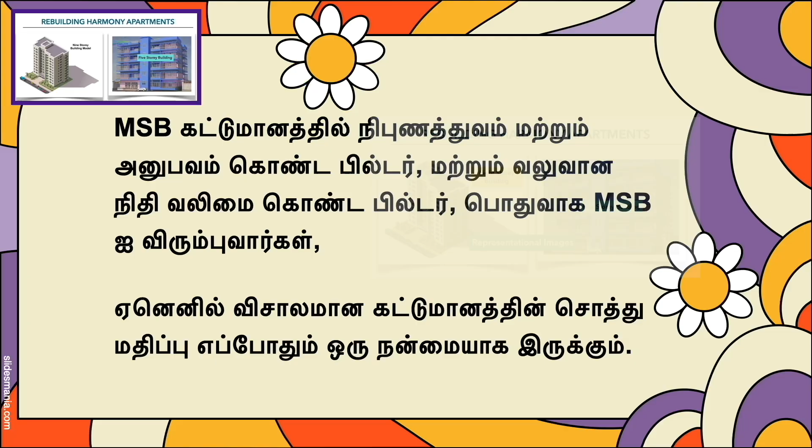The FSI calculations. One of the general points of discussion is the FSI calculations. Floor Space Index for Indian cities. Floor space index is a measure of the total permissible construction area on a given plot of land. The permissible FSI in Chennai varies based on the location and type of construction. For residential buildings, the FSI is generally lower compared to commercial buildings. The Chennai Metropolitan Development Authority has set the FSI for residential buildings at 1.5 to 2 in most areas.

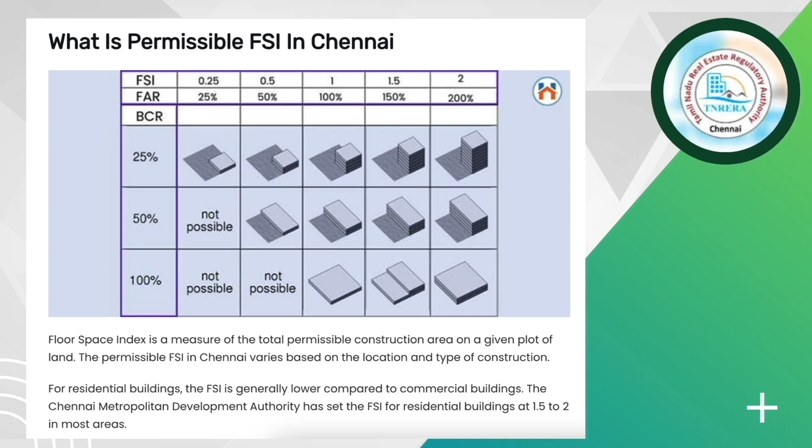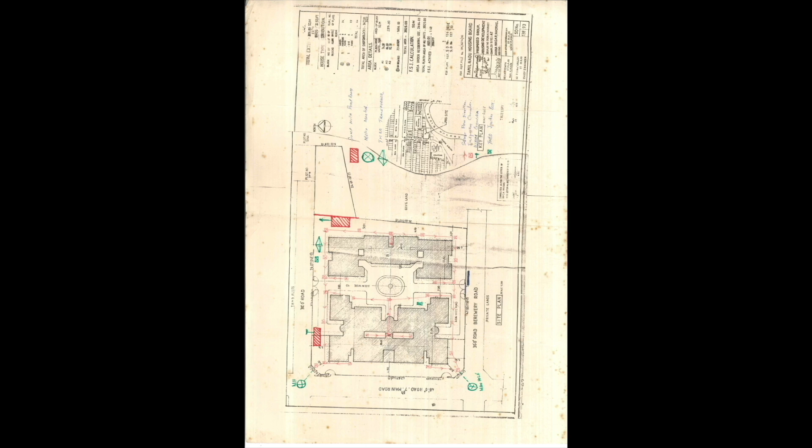FSI, or Floor Space Index, is a measure of the total permissible construction area on a given plot of land. It is a ratio of the total built-up area of all floors in a building to the total area of the plot. The total land extent available for redevelopment is quoted as about 80,000 SFT by builders. The final area will be declared by CMDA after the builder submits the relevant land documents, and it is most likely to be around the same area quoted by builders. Efficiency in space can be managed only in common area defined in the CMDA rules.

Key points to remember. According to Tamil Nadu RERA regulations, areas like staircases, utility spaces, and certain common areas are typically excluded from the FSI calculation, meaning they are not counted towards the total floor area allowed on a plot of land. Essentially, these areas are not included in the calculation when determining the permissible building area on a property. Areas excluded from FSI. This generally includes spaces like staircases, lift shafts, corridors, and sometimes even common areas like balconies, depending on specific regulations.

Importance of checking specific regulations. While the general principle of excluding certain areas from FSI applies, the exact details of what is included or excluded can vary based on the local development authority and building. Areas not covered under FSI can be planned spacious in an MSB, to make the common area more spacious for a comfortable living.

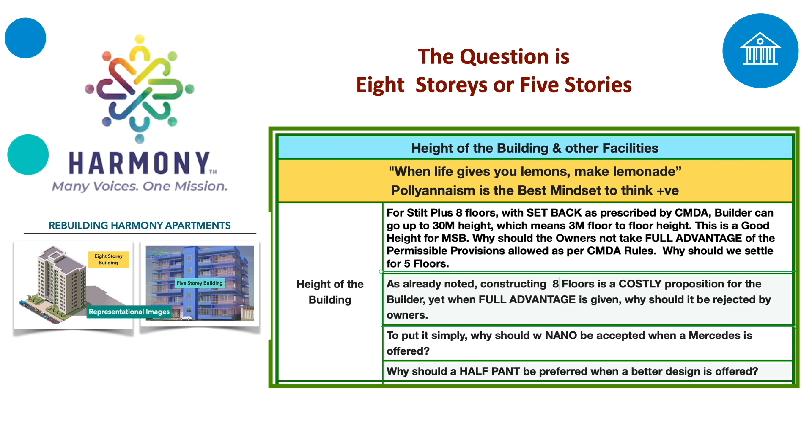To put it simply, why should a Nano be accepted when a Mercedes is offered? Why should a half pant be preferred when a better design is offered? Can the 5-story be changed to a 9-story building?

Foundation is the structural base of a building that supports the entire weight of the building and transfers loads to the ground. Foundation ensures stability, prevents settlement, and protects against environmental forces. Shallow foundations are generally used for non-MSB buildings. Shallow foundations are roughly 1 to 3 meters in depth. As expected, they don't distribute loads far into the ground. For this reason, they tend to cost less than deep foundations as they require less labor and resources to implement.

Ramaniyam has planned for deep foundation, pile foundation, for structural stability. In a building of similar size, 90,000 land extent, about 210 piles were erected.

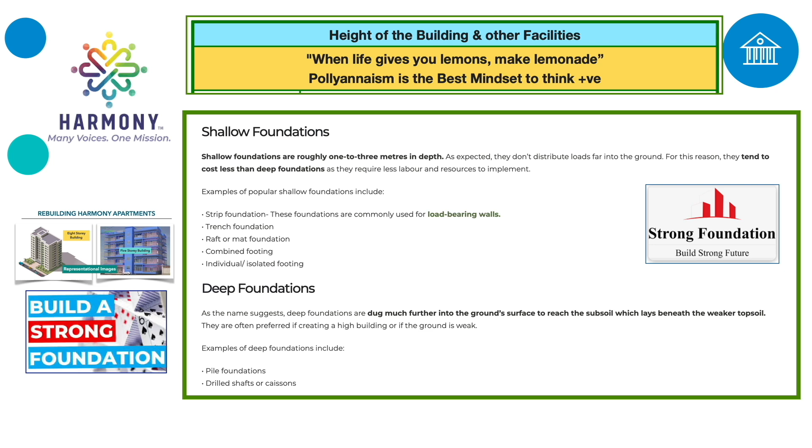Generally, the total area sanctioned by CMDA after FSI approval is slightly higher, and the higher area sanctioned by CMDA is distributed as per the sharing ratio, which results in a slight increase in plinth and carpet area. Traditionally, a simple formula has been used to calculate the carpet area, which is: carpet area equals bedroom plus living room plus kitchen plus balconies plus toilets minus inner wall thickness.

As per the RERA Act of 2016, the RERA carpet area formula is: RERA carpet area equals net usable area of the apartment, excluding external walls, terrace, balcony and veranda, plus internal partition wall areas. There is a 5% difference between the general carpet area and the RERA carpet area.

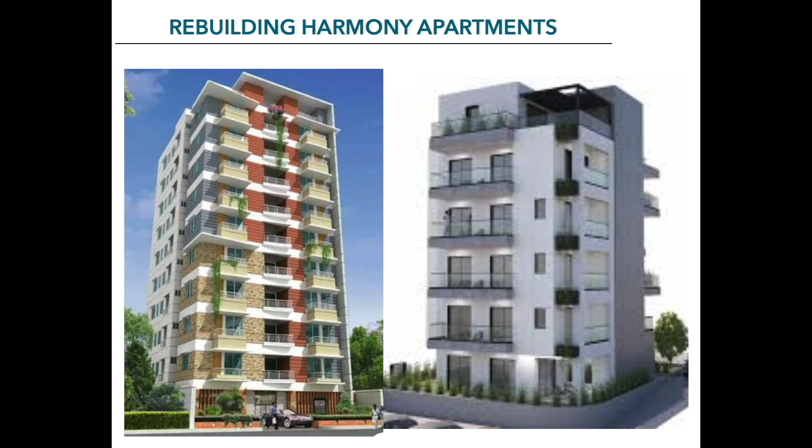MSB proposal. Builder has offered a single tower building, only 9 flats per floor. Each flat an independent unit with no common walls, spacious covered car parking, spacious visitors car parking, 10 car parking for shops, two-wheeler parking, spacious pathway for vehicle movement. Association room cum multipurpose hall, security room with toilet, two lifts of 10 to 13 passenger capacity, two staircases. Fire hydrant as per the CMDA rules.

Water harvesting. Naturally, the cost of construction would be higher for the MSB. The CMDA approval for MSB, and fees for various approvals and services would also be higher. The comparison of MSB versus HRB has hence been deflected to maintenance cost. This is being dealt with next.

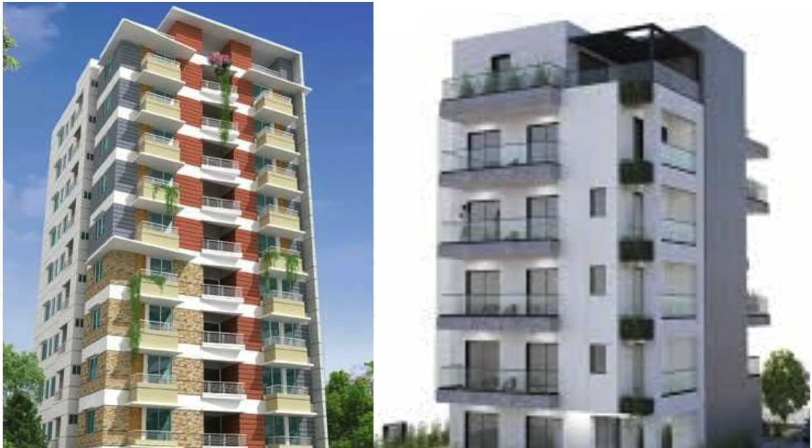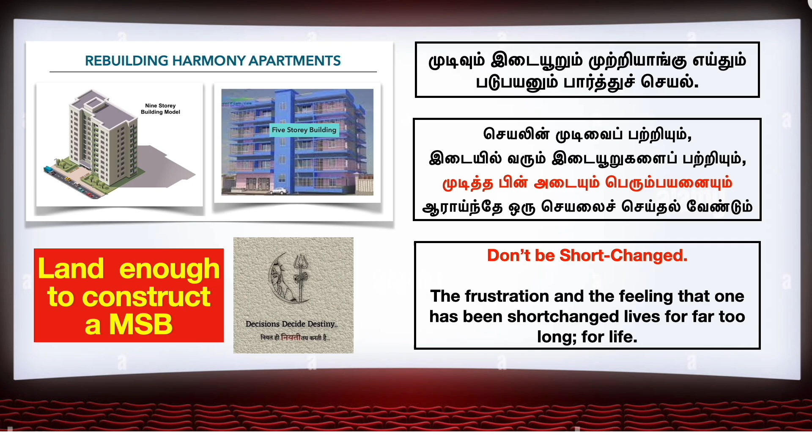Don't be shortchanged. The frustration and the feeling that one has been shortchanged stays for far too long, for life. Other points to note. Supreme Court says property ownership only on registration of sale deed. In a recent property case decision, the Supreme Court ruled that ownership of immovable property is transferred only upon the registration of the sale deed. The court emphasized that merely taking possession of a property does not confer ownership.

A bench headed by Justice B.V. Nagarathna of the Supreme Court said in its decision that, as per the provision of Section 54 of the Transfer of Property Act of 1882, property transfer can be done only through registered documents.